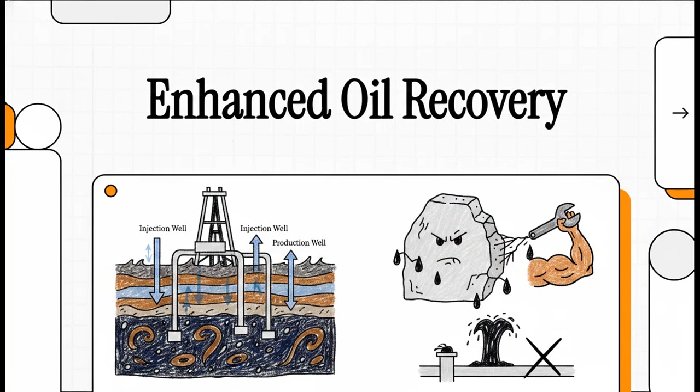Today, we're taking a fascinating look deep underground, and honestly, we're diving into the harsh, undeniable physical realities of offshore engineering and reservoir management. You know, when a lot of people think of drilling for oil, they picture this massive geyser of black liquid just bursting to the surface, flowing endlessly on its own. But the reality of how a reservoir actually behaves is, well, it's a lot more stubborn than that. As any senior engineer will tell you, simply finding the oil is really only half the battle. Coaxing it out of the rock, that is where the real engineering against the limits actually begins.

And here's the harsh reality of reservoir engineering. Without human intervention, most reservoirs will only naturally produce maybe 10 to 30% of the oil they actually contain, meaning an astonishing 70 to 90% of the oil is just naturally left behind. Think about that for a second. Imagine building a multi-billion-dollar offshore platform, drilling miles beneath the ocean floor, and then leaving almost all of the product completely untouched. Obviously, that's not going to work. So that's the baseline we're working against.

So why does all that oil stay behind? Well, it doesn't just sit down there in some massive, hollow underground cavern. It actually exists within the tiny microscopic pores of solid rock, kind of like water trapped inside a dense, heavy sponge. It's physically held there by capillary forces, and as the reservoir pressure inevitably drops, that oil is increasingly replaced by water. In the very beginning, sure, the natural pressure of the earth is enough to squeeze some of it out, but almost as soon as production starts, that natural pressure begins to decline, and eventually, the reservoir simply runs out of the energy required to push that oil all the way to the surface.

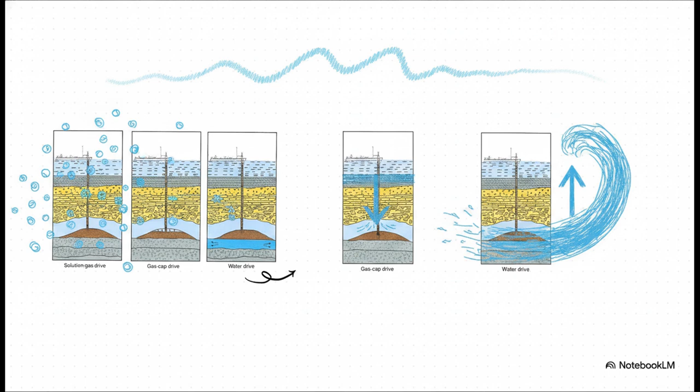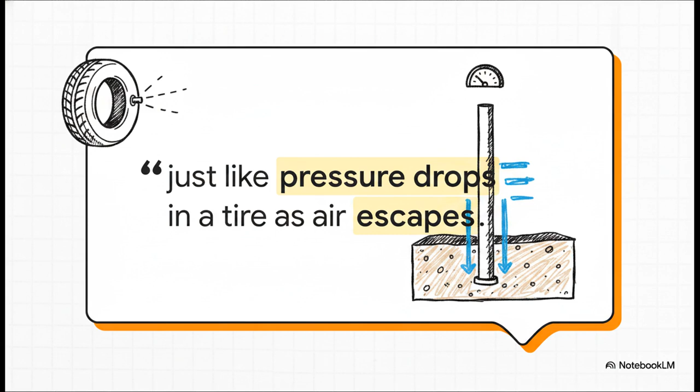But here is the catch. Regardless of which natural drive you're lucky enough to have, over time, they all weaken. It's pure physics. As oil is produced and removed from the rock, the pressure within that rock drops. It's exactly like how pressure drops in a tire as air escapes. It really is that simple. And eventually, the reservoir pressure drops below the flowing wellhead pressure, which is the force required to push that heavy fluid up miles and miles of vertical tubing. When that happens, the oil can no longer flow. The well just dies. And this brings us to the definitive strategy engineers use to fight back.

It's called Enhanced Oil Recovery, or EOR. EOR is essentially the catch-all term for everything we do to assist extraction, push way beyond that natural recovery limit, and artificially maintain reservoir pressure. Whether we're installing specialized mechanical equipment downhole or actively injecting water or gas back into the reservoir to replace the sheer volume of oil we've taken out, EOR is how we extend the life of a field and drastically improve the economics of the whole operation.

Moving on to Section 2, water injection and treatment. This is actually the most widely used EOR intervention in the world. Because oil is mostly incompressible, taking a barrel out means you absolutely have to put a barrel of something else back in to keep the pressure up. And offshore, well, we happen to have an endless supply of seawater right there.

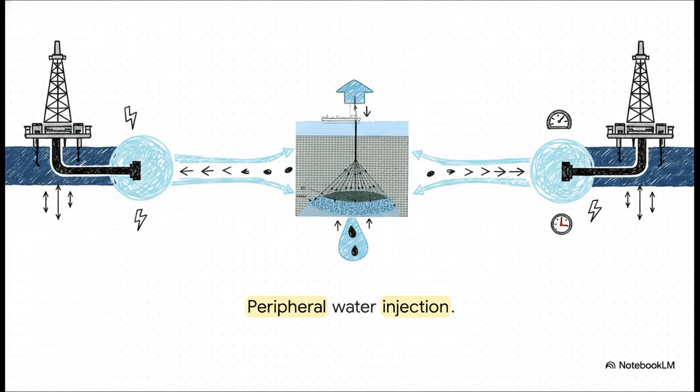We utilize what's called peripheral or flank water injection. Engineers drill dedicated injection wells right at the outer edges of the oil-bearing rock. Then, immensely powerful centrifugal pumps up on the platform push treated seawater down into these wells at massive pressures. We're talking up to 5,000 psi. That literal wall of injected water physically sweeps through the rock, forcing the trapped oil toward the production wells located in the center.

But here's the thing. You absolutely cannot just pump raw seawater into an oil reservoir. If you did, you would completely destroy a multi-billion-dollar asset in no time. Seawater requires a rigorous 4-stage treatment process first. Step 1 is coarse filtration, just getting rid of the marine organisms and large suspended particles. Step 2 is deoxygenation. Usually, we use a massive deaerator tower where the seawater contacts a countercurrent gas, like nitrogen or natural gas, which literally sweeps the oxygen out. We have to get dissolved oxygen below 20 parts per billion.

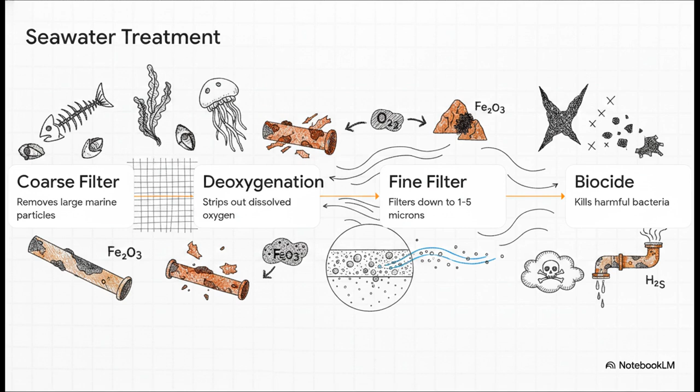Why? Because any oxygen would cause severe, rapid corrosion of the injection system and plug up the reservoir rock with iron oxide precipitates, basically rust. Step 3 is fine filtration, getting down to 1 to 5 microns so we don't clog the microscopic pores of the rock itself. And finally, step 4 is a heavy biocide treatment. We have to kill off sulfate-reducing bacteria, or SRBs. If they get down there, they sour the reservoir by producing hydrogen sulfide, a highly lethal and incredibly corrosive gas.

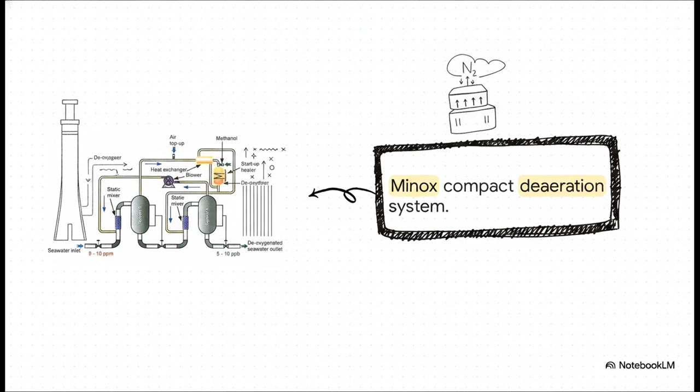Let's look at Section 3, gas injection and gas lift. Two totally different ways of manipulating pressure. Gas injection actually works a lot like water injection. We take associated gas from production, or even purchased gas, compress it to an extreme degree, sometimes up to 12,000 psi, and force it back down into the reservoir rock. This replaces volume and maintains pressure, and it's especially effective for gas cap reservoirs. Plus, it brilliantly solves the logistical nightmare of what to do with produced gas when you don't have a pipeline to export it.

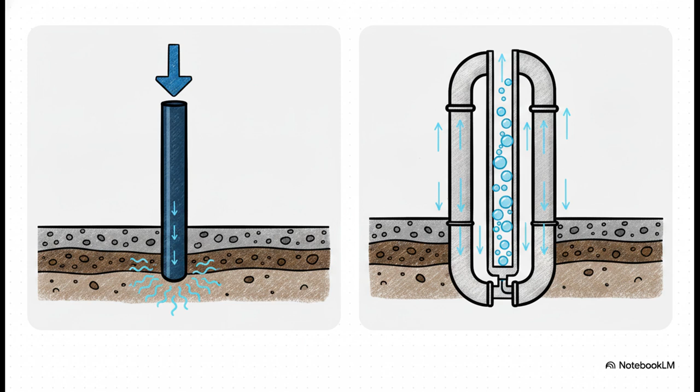But gas lift is an entirely different physical mechanism. Instead of pushing gas deep into the rock itself, we inject high-pressure gas into the annulus. That's the empty space between the production tubing and the casing. The gas is forced through special valves at various depths to bubble up inside the column of oil. And the elegance of gas lift is truly something to appreciate. By aerating that column of oil with gas bubbles, we are drastically reducing its specific gravity. We're making the fluid physically lighter.

And the lighter fluid column requires significantly less static head pressure at the bottom to lift it all the way to the surface. It is such a brilliant solution because it uses the platform's own natural gas to do the heavy lifting, all without requiring any complex, moving mechanical parts sitting thousands of meters downhole. But of course, there comes a time when the reservoir pressure is so completely depleted that even lightening the fluid with gas lift just isn't enough.

Which brings us to Section 4, Deep Well Submersible Pumps, our mechanical solutions of last resort. When the rock simply cannot push anymore, we have to pull. We do this by installing an electrical submersible pump, or ESP, directly into the production tubing string, sometimes sitting up to 2,000 meters downhole. Let's break down the anatomy of this incredible piece of machinery. Right at the bottom, you have the motor. It's a long, slender AC induction motor. It has to be slim enough to fit inside the wellbore, but it is packing serious horsepower.

Right above that is the seal section. This is absolutely critical, because it equalizes the pressure between the inside of the motor and the harsh wellbore, keeping well fluids from getting in and frying the electronics. Then comes the pump itself, which is made up of multiple centrifugal stages stacked on top of each other, continuously adding pressure to the fluid. And finally, running all the way back up to the surface, is the power cable, literally clamped to the outside of the tubing, delivering hundreds of kilowatts of power deep underground.

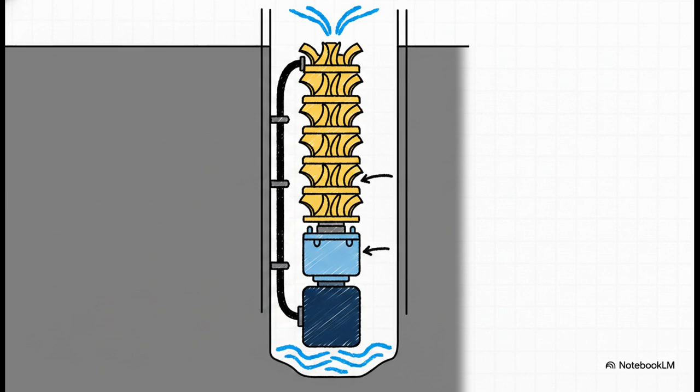Now, ESPs are phenomenal, but they do have a major rival out there, the hydraulic submersible pump, or HSP. See, an ESP requires running a very vulnerable high-voltage electrical cable miles underground. An HSP avoids that completely. Instead of electricity, it uses surface pumps to drive highly pressurized hydraulic fluid, called power fluid, down the well to spin its downhole turbine pump.

The huge advantage here is safety and durability. Zero high-voltage electronics downhole. But the trade-off: you have to constantly manage all that power fluid circulation. Because that hydraulic fluid mixes directly with the produced oil, your surface platform now has to do the extra work of separating all that additional fluid once it gets back to the top. Still, both ESPs and HSPs are unbelievable feats of engineering designed to conquer that loss of natural pressure.

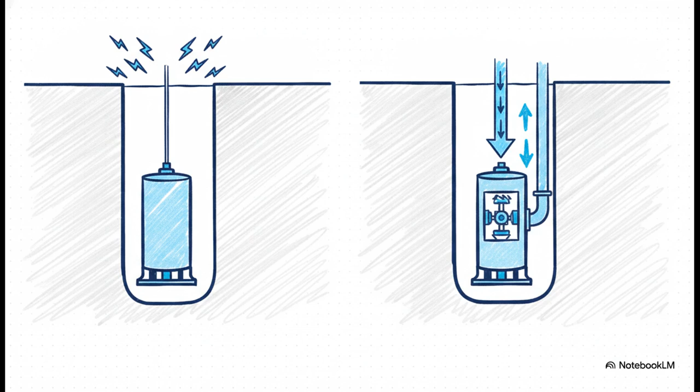So, why do we go through all this incredible effort, complexity, and expense? Because the stakes are absolutely massive. By utilizing water injection, gas lift, and submersible pumps, engineers aren't just scraping the barrel for a tiny bit more oil. These systems extend the productive life of a field significantly, very often by 5 to 15 extra years beyond what natural flow alone could ever achieve. They are a critical, indispensable tool in maximizing recovery from maturing offshore fields. We are essentially transforming a dying asset into a highly productive one and bumping that total oil recovery up to 45%, instead of abandoning the well at just 20%.

Which leaves us with a really fascinating thought about the future of this industry. As these reservoirs mature, they naturally produce more and more water along with the oil, which severely chokes the surface facilities. The next major frontier we are looking at is moving these massive separation and pumping systems entirely down to the ocean floor. By separating the water right at the wellhead and injecting it straight back into the seabed, we completely eliminate the need to pump all that dead weight miles up to the surface.

So, the big question is, how much further can these underwater processing factories push the limits of aging reservoirs well beyond the 15-year life extensions we are already achieving today? It is a genuinely thrilling frontier for engineering.